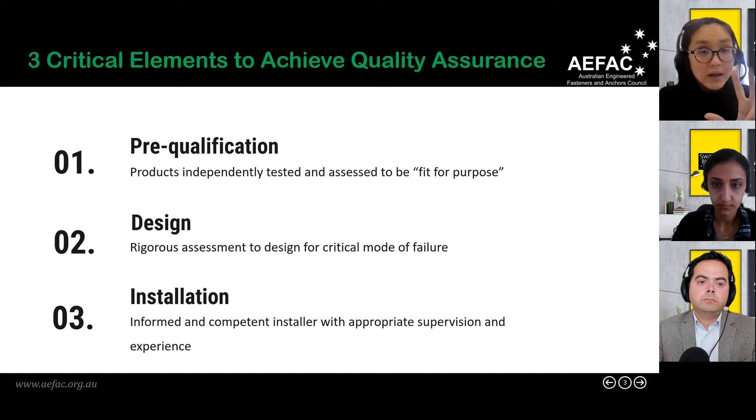Number two, robust design is required to ensure that all possible failure modes have been considered and the anchor is designed for the critical failure mode. The third element important for quality assurance is installation, which tends to be the weak link. Many failures have occurred in the past due to poor installation practices. So all three elements are critical to ensure good quality assurance for the fastening.

A bit of introduction to AEFAC. AEFAC is a not-for-profit industry initiative founded in 2012 by Swinburne University and six other industry partners, as you can see on the slide: DeWalt, Hilti, Hobson, Leviat, Ramset, and Wurth, to introduce governance to the anchor industry based on the three critical elements for quality assurance we just visited earlier. Prior to the formation of AEFAC, the industry was fragmented. There was no uniformity or consistency in terms of anchor pre-qualification, specification, design, or testing.

AEFAC has since grown. There are currently 13 industry members contributing to the work done by AEFAC.

AEFAC contributes to various sectors in the anchor industry to uplift safety, quality, and efficiency. For designers, AEFAC provides guidelines for design and specification of anchors. For contractors, AEFAC provides training and certification for installation of anchors. For field engineers, guidelines are provided for field testing of anchors on site. For manufacturers, guidance is provided for minimum performance required for anchors in safety-critical applications. And lastly, at Swinburne, we continue to do a lot of R&D in various research areas, such as performance of anchors in early-age concrete, seismic, and other types of innovative concrete.

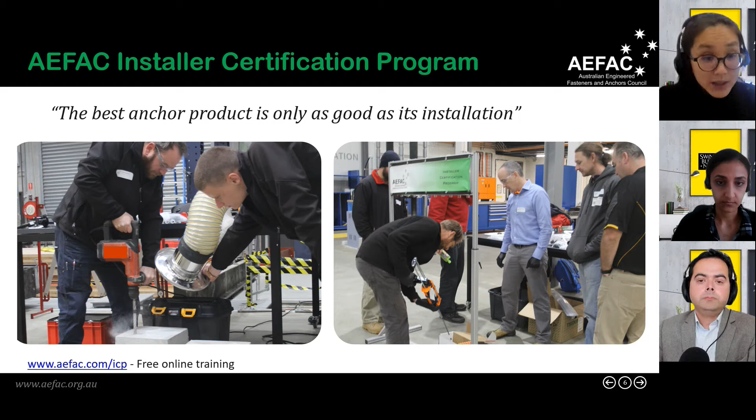AEFAC instigated the development of TS 101 in 2015, which is the first deemed-to-satisfy guideline for design of anchors in concrete. TS 101 was then developed into a full Australian standard, AS 5216, in 2018. And this year, the new version of 5216 is published.

AS 5216 covers the design of post-installed anchors and anchor channel. However, the items listed in red were not covered in the 2018 version. In the latest revision in 2021, we have now covered items for seismic, anchor channel in three-dimensional loading, post-installed rebar connections, and redundant non-structural connections.

There will be other webinars coming up to cover the other topics, but for today, we are looking at design for seismic actions.

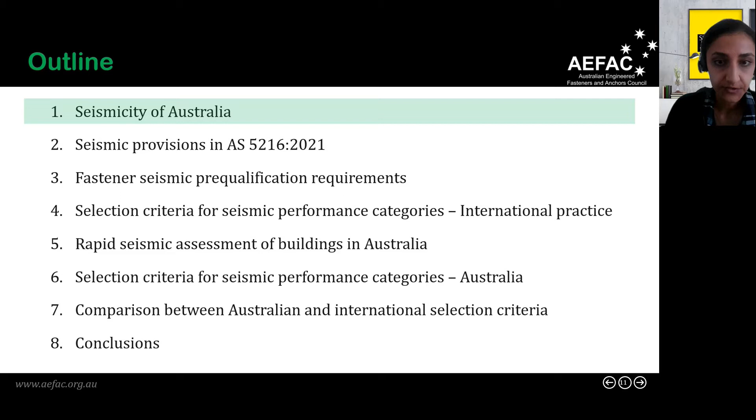Starting with the seismicity of Australia. As most of you know, Australia is considered to be a low to moderate seismic region. I'm going to play this video here from Geoscience Australia, which is showing the significant earthquakes that have happened in Australia since 1964. We can see that Australia does experience frequent earthquakes, even though it is typically considered to be tectonically stable.

Australia is actually one of the most active intraplate regions in the world, as it's in compression due to the Indo-Australian plate moving towards the Eurasian and Pacific plates. As stated by Geoscience Australia, Australia is subjected to earthquakes of magnitude 5 or greater on average every 1 to 2 years, and earthquakes above magnitude 6 occur about once every 10 years.

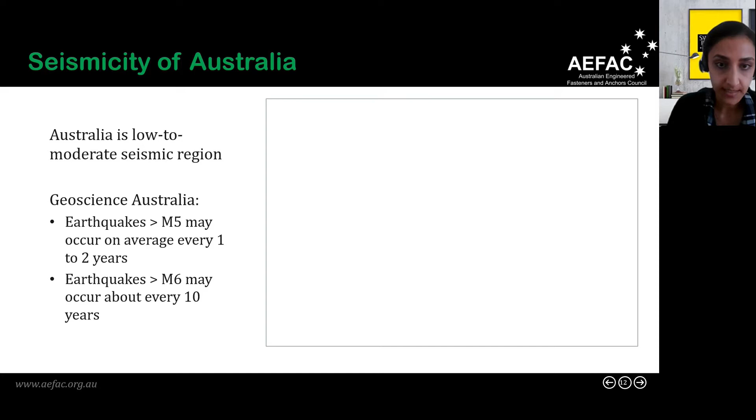This is the current seismic hazard map, which is in the Australian Earthquake Loading Standard, AS 1170.4. One key challenge with Australia is predicting where earthquakes can take place, and that's why since 2018, the standard has specified minimum hazard levels for different return period events defined by the variables kp and Z. So now the minimum hazard design factor to be considered for a 500-year return period event is set to 0.08.

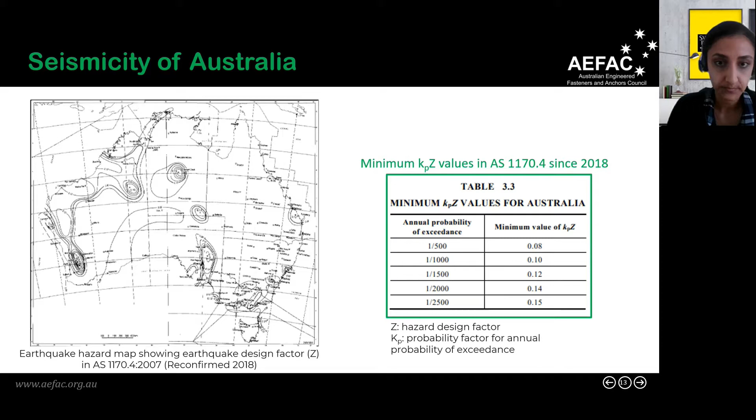I'd like to also highlight that in the past we have seen significant damage caused by relatively moderate magnitude earthquakes. One of the most damaging and costly earthquakes was the 1989 Newcastle earthquake, which was magnitude 5.6. It caused 13 fatalities, 160 serious injuries, and resulted in 50,000 buildings being damaged and around 300 buildings requiring demolition. We've had larger magnitude earthquakes as well, but because most of them have happened in remote locations, the damage caused has not been as great as the Newcastle earthquake.

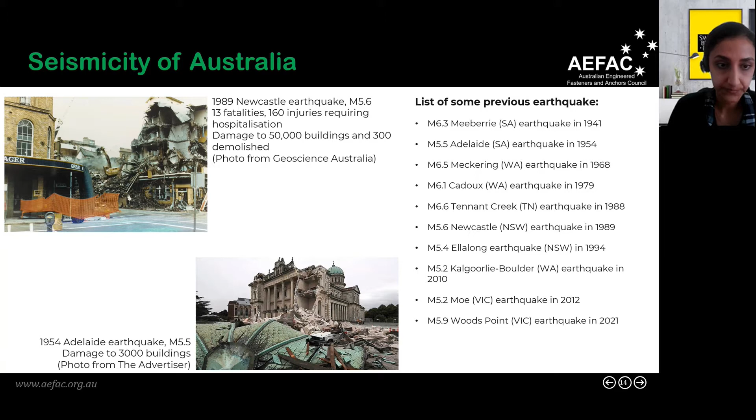Now, for those of you in Victoria, a couple of weeks ago you would have experienced some shaking. On September 22nd, Victoria had the largest earthquake that has been recorded: a magnitude 5.9 earthquake near Woods Point, approximately 130 kilometres east of Melbourne. The earthquake event as experienced in Melbourne was less than 20% of the design event for most buildings. For this size of event, it was expected that buildings would respond within their elastic range with minimal damage, and this was generally observed all throughout Melbourne.

In general, the most vulnerable buildings to earthquakes are unreinforced masonry buildings, which can fail at lower earthquake events, and an example of this was seen with one of the buildings on Chapel Street.

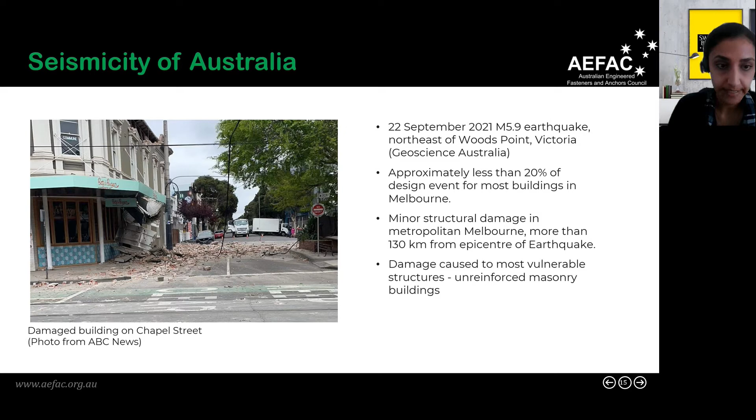So now I'll move on to discussing the seismic provisions that have been added in the 2021 version of AS 5216. The design requirements for seismic actions have been included in Appendix F of the standard, and I've just highlighted the clauses that you will find in that appendix.

In terms of the scope, it needs to be considered for structural and non-structural elements that need to be designed for earthquake actions in accordance with AS 1170.4. The scope currently covers post-installed fasteners located in regions of concrete members where concrete spalling or yielding of reinforcement is not expected to take place. I'll talk a little bit more about this point later on.

The standard describes the pre-qualification requirements in Clause F3, and the design requirements are provided in Clause F4 to F7. Reference is provided to the AEFAC technical note for design, which you can find on the AEFAC website. My presentation today will focus on the pre-qualification requirements, and then Tilak will discuss the design requirements.

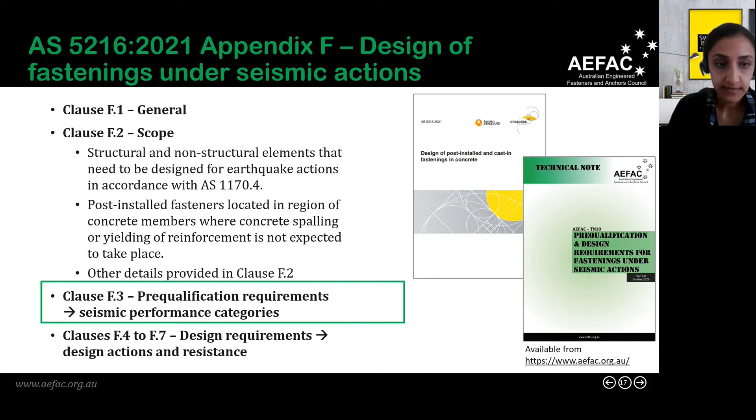So moving on to looking at the seismic pre-qualification requirements for fasteners. Generally speaking, fasteners don't have predictable capacities for all failure modes, and therefore they require pre-qualification, which involves a series of tests and assessment procedures to define their performance.

Different pre-qualification is required based on the intended use of the fastener. The pre-qualification requirements are provided in AS 5216, which refer to European assessment documents or technical reports. There are 4 levels of pre-qualification. The first 2 are for cracked and uncracked concrete, and these include tests conducted for reliability and service conditions of the concrete substrate.

For cracked concrete, the fasteners are tested in approximately 0.3 mm crack widths. These requirements are covered in the 2018 version of AS 5216.

Now, the other 2 levels of pre-qualification are for seismic conditions, and they're referred to as Seismic Performance Category 1 and 2, or simply C1 and C2. These are now included in the 2021 version of AS 5216.

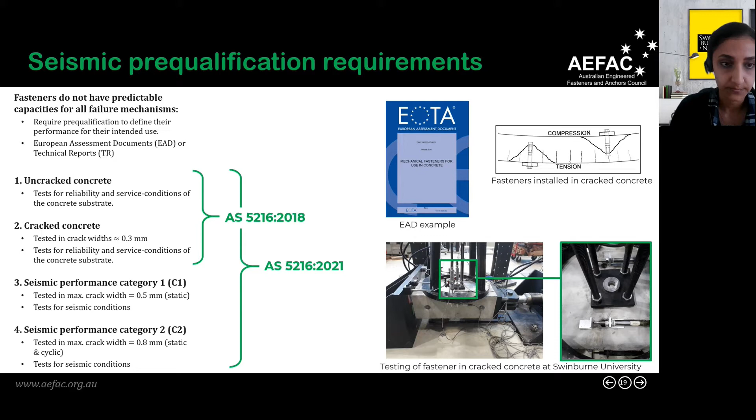The seismic pre-qualifications are based on European practice, provided in the Technical Report 49 by EOTA, the European Organisation for Technical Assessment. For C1 category, the fasteners are installed in a crack which is open to 0.5 mm.

Then the fasteners are subjected to pulsating tension and alternating shear loads. The crack width is kept constant throughout the test, and the fasteners are not allowed to fail at a specified load and number of cycles. If they do fail, then the test must be repeated at a reduced load.

For C2 category, similar tests are conducted as for C1. However, the cracks are opened to 0.8 mm during cyclic load tests. There's also an additional crack cycling test where the crack is opened and closed under tensile load, done to simulate the effect of moment reversals that may be experienced by a structural member.

I'd like to also note that similar pre-qualification requirements also exist in the United States. However, they currently only have 1 seismic performance category, which is equivalent to C1, but they're also in the process of introducing a 2nd category, which will be similar to C2.

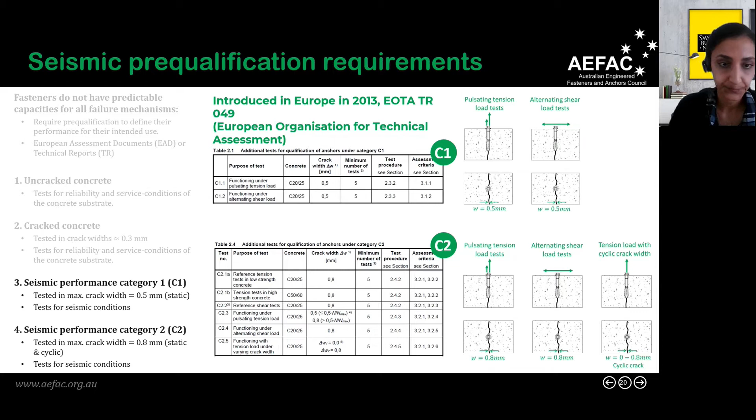So the seismic pre-qualification requirements discussed today all assume that the fasteners are located outside of regions where yielding of reinforcement and spalling of concrete may occur. So if we're looking at flexural members, this means that it's outside of plastic hinge regions.

And this is reflected by the conditions under which the pre-qualification tests are undertaken, including the maximum crack width limit of 0.8 mm, which is based on studies that have shown that at yield, the upper bound estimate of the crack width is around 0.8 mm.

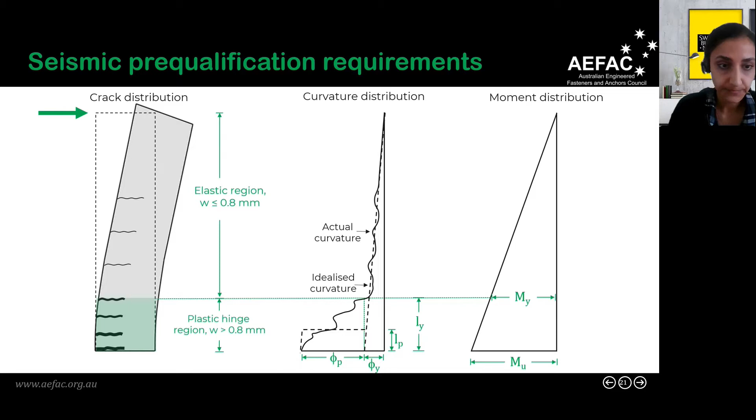So having the different levels of pre-qualification leads to the question, what level of pre-qualification is required for fasteners designed to resist seismic actions? To answer this question, we first reviewed international practice to see what type of selection criteria is adopted.

And that takes us to the 4th item for this presentation. I'll just briefly go through some of the selection criteria that we see in international standards.

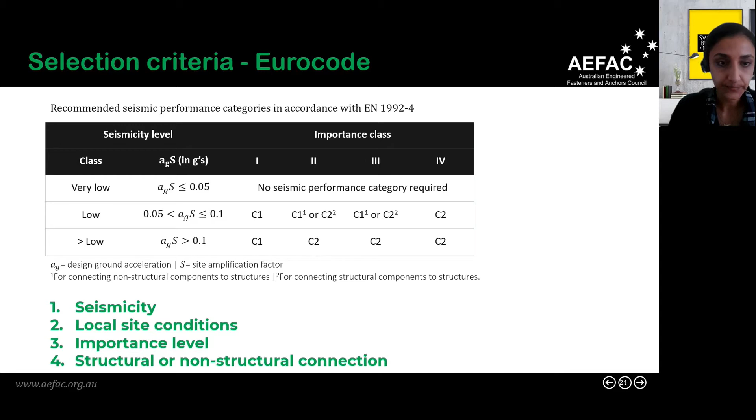However, since it's not always practical or feasible to calculate the crack widths, they also use the behaviour factor to approximate the expected crack widths. The behaviour factor is a parameter used in design which accounts for the level of intended inelastic response of the structure. It is equivalent to the ductility factor divided by the structural performance factor in accordance with the Australian practice for seismic design.

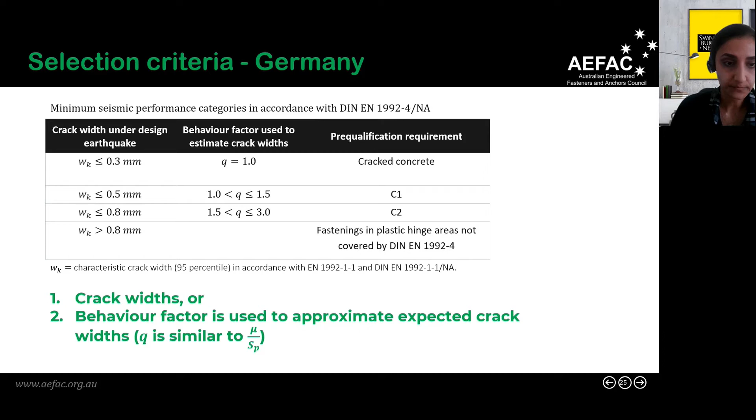In the United States, the fasteners need to have seismic pre-qualification based on the seismic design category of the structure, and these are assigned based on seismicity, local site conditions, and risk category. Also, with the introduction of the second seismic performance category, it is likely that this selection criteria will be extended, and it may incorporate a structural response parameter.

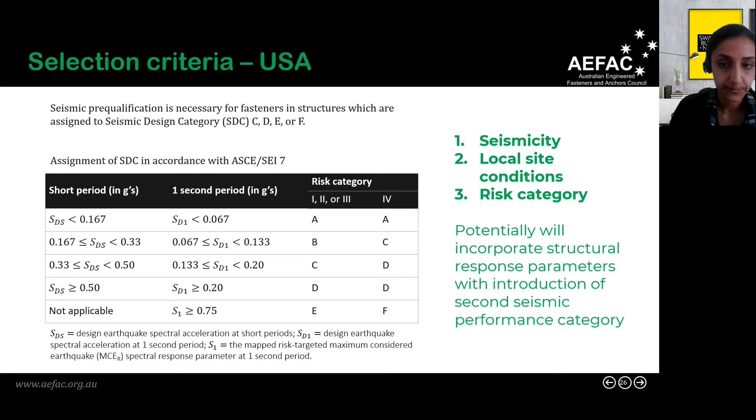So what we can see is that in general, there's no consensus on the parameters or limits used to define selection criteria in different standards. Each country or region has adopted a method suitable for their own seismicity, design, and construction practice. But in general, we can see that they have considered one or more parameters related to seismic design, design of the structure, seismic demand, and also the consequence of failure of the structure.

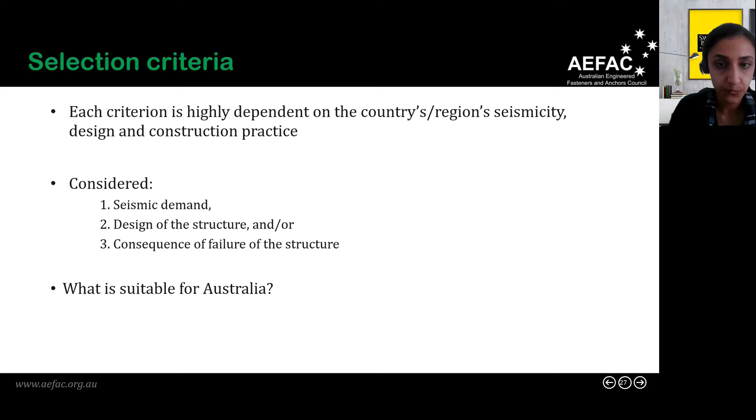So the question that remained was, what is suitable for Australia? And to help us answer that question, we first undertook rapid assessment of buildings in Australia.

The approach that was adopted used displacement-based principles instead of force-based principles, which are typically used in design. The advantage of using a displacement-based approach is that the focus is on deformation demand, which can then be more directly related to the damaged state of the building and its components. And this assists with determining the level of pre-qualification that is required for the fasteners.

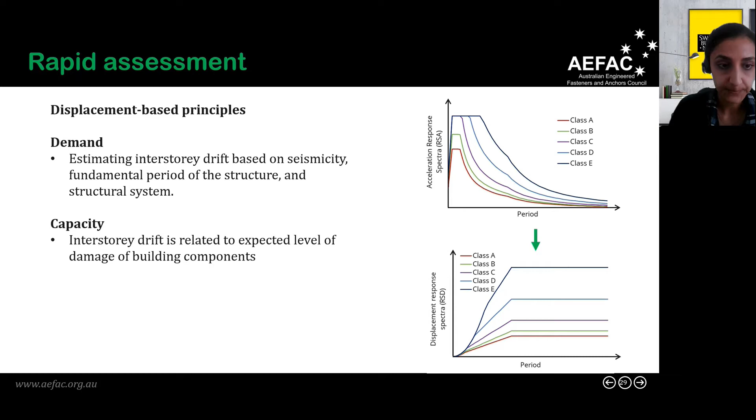This is an overview of the assessment approach that was adopted to approximate the seismic displacement and drift demand on a building, which used existing models in the literature. Different types of buildings, including worst-case scenario type of buildings with plan asymmetry, were considered for a range of earthquake intensities and different site conditions.

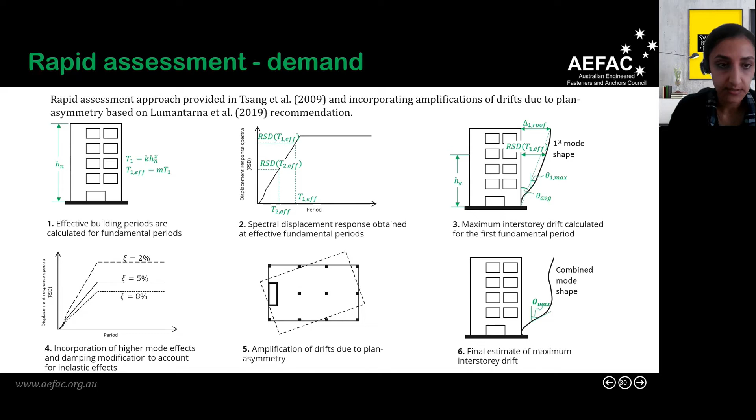Then we set limits to the interstory drifts for which the different seismic performance categories are likely to be suitable. And to develop these limits, we looked at interstory drift that is likely to correspond to initial yield of flexural members, experimental results for the progression of crack widths and drift demand, and expected ultimate drift capacity of the building components.

And what we concluded was that for drifts less than 0.5%, seismic pre-qualification of the fasteners is not required. For drifts between 0.5 and 1%, C1 category was necessary, and then for drifts greater than 1%, we suggested C2 category.

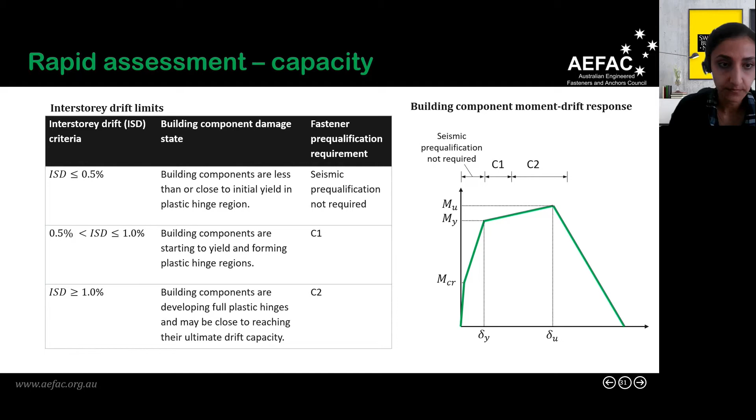We then plotted the expected maximum interstory drifts for various buildings considered, so buildings with various heights, and for a range of seismic intensities and site conditions, which was defined by using the parameters in the Australian Earthquake Loading Standard, including KP, the probability factor, Z, the hazard design factor, and FV, the site amplification factor in the velocity control region. And this can be calculated from the response spectra provided in AS 1170.4 for the various site conditions.

And by looking at the 95th percentile of the results obtained, we looked at the limits at which the 0.5% and 1% drift were reached.

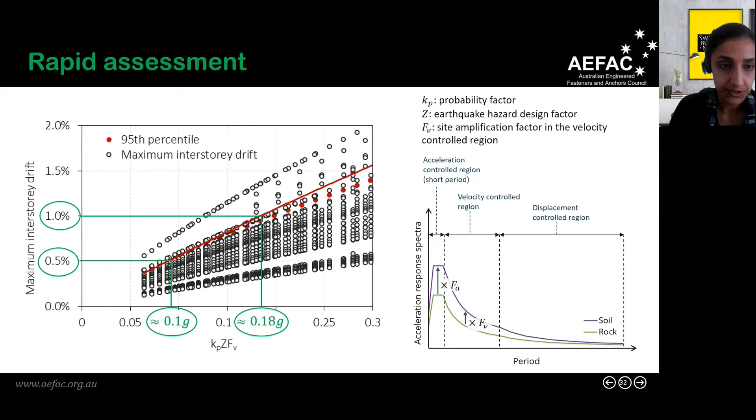So the limits from the previous graph were then used as a guide to develop this table here, where essentially the limits obtained from the analysis are directly adopted for importance level 2 buildings. And then for importance level 3 and 4 buildings, the minimum level of pre-qualification is set to C1 and C2 respectively.

And this is because the failure of connection in these high importance level buildings will have greater consequences. Also, you'll notice that seismic pre-qualification is not defined for importance level 1 buildings, and this is because AS 1170.4 does not require seismic design of these structures. So essentially, we've ended up with a table that is similar to Eurocode, but it's based on what we expect to be suitable for Australian conditions.

We have also not set separate requirements for structural and non-structural connections. And this is because if a connection is safety critical, then the failure of the connection can be equally severe.

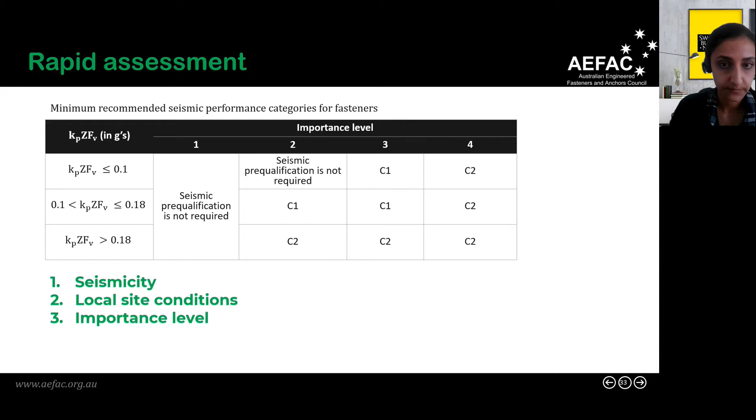So now I'll go through the selection criteria that you'll find in AS 5216. You'll notice that we've included two criteria for determining the seismic performance category required for the fasteners: one referred to as a normative requirement, and another referred to as an informative requirement.

This is the table in AS 5216 that we've included as an informative requirement. It's essentially the same table I showed previously as a result of the rapid assessment. However, instead of showing the site amplification factors, we've specified the requirements for each site class separately, to make sure the information is presented consistently with AS 1170.4.

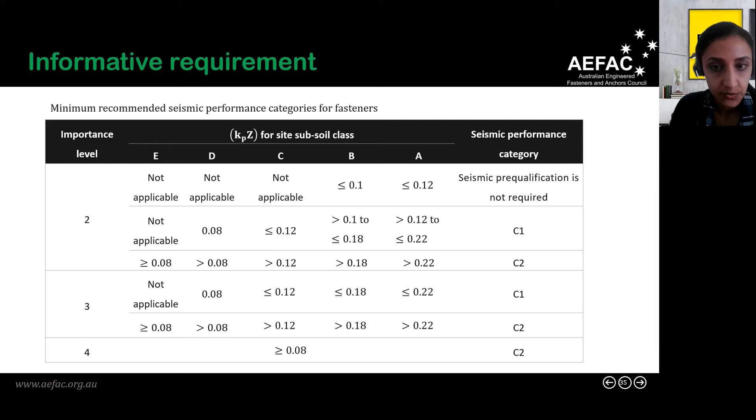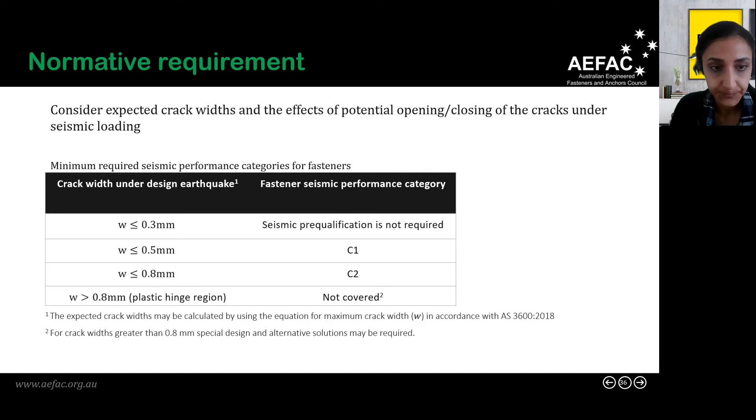I'd also like to go through a couple of examples which show the seismic performance category required for fasteners for different buildings, and we've done a comparison using both the Australian selection criteria and some international standards.

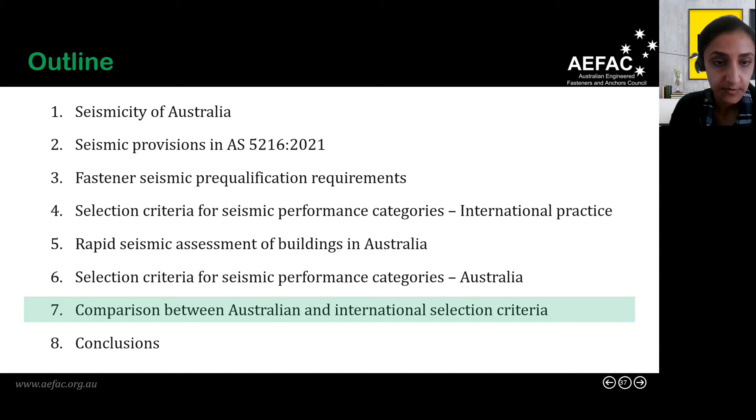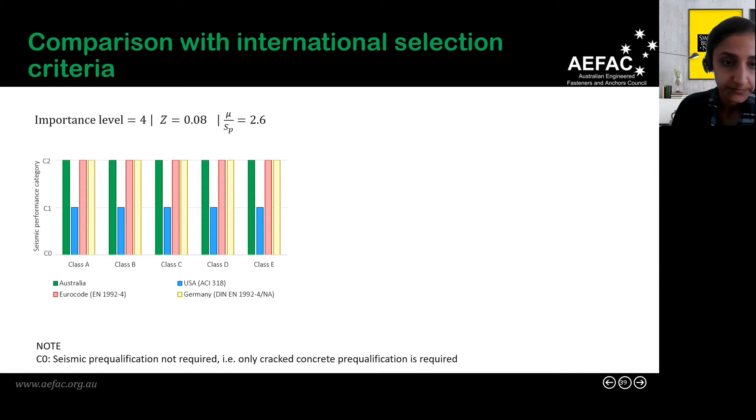Before I end, I'll go through some conclusions. I've provided a brief overview of the study undertaken to develop the criteria for selecting suitable seismic performance categories for fasteners in Australia. Two forms of criteria have been provided in AS 5216: one is a normative requirement, which involves assessment of the structures to determine the expected level of damage to the concrete substrate, and the other is an informative requirement, where the level of pre-qualification is determined based on seismicity, local site conditions, and importance level of the building.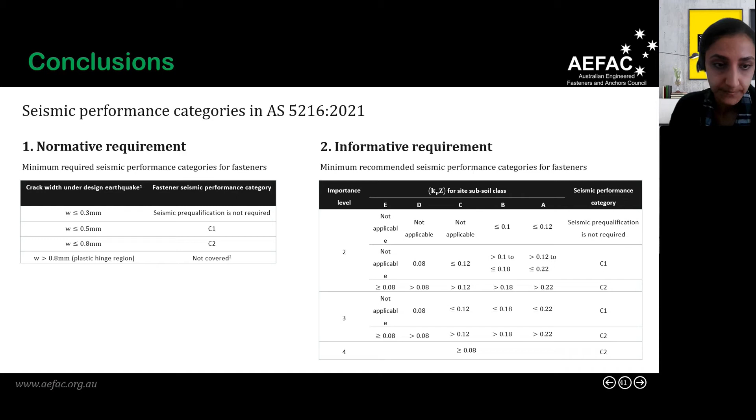Thank you, Anita, for covering the pre-qualification part. I will be talking about the design part. Before starting the design requirement, I'll start with the scope and limitation of the standard. The current requirement given in AS 5216 2021 is only for post-installed fasteners. There is also a requirement for the low seismic region: for example, if the seismic design tension force in a fastener or group of fasteners is less than or equal to 20% of the design force combinations, some sections of the standard can be omitted.

Stand-off fasteners with a grout layer more than 0.5 times the diameter of the fasteners are not covered by the standard. Similarly, fastenings for redundant non-structural applications are not covered. The standard assumes that loosening of nuts and screws is prevented throughout the life of the connections. And finally, it doesn't cover fastenings in plastic hinge regions.

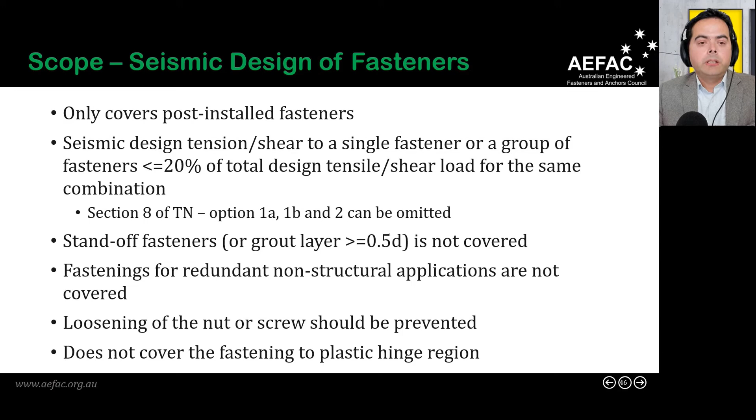For the provisions, the design of connections for the transmission of earthquake loads is carried out in accordance with Appendix F of the standard, as Anita mentioned before, and the design value of the seismic actions is determined in accordance with 1170.4. There is a distinction in the standard on the design options depending upon the ductility requirement of the connections.

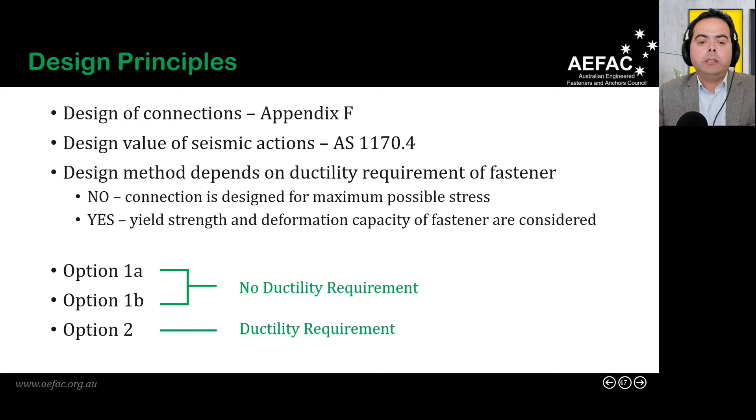Accordingly, there are three design options given in the standard. Option 1A and 1B are for conditions where there is no ductility requirement in the connections or due to the fasteners, and option 2 is used where the ductility requirement of the fasteners is considered.

So let's talk a little bit more about those design options. Let's start with the first one, capacity design. The connections are designed for the maximum stress that can be reached when ductile failure of the component to be connected occurs, and the fasteners will stay within the load limit, with no damage in the fasteners.

Option B is the elastic design option, and the connections are designed for the maximum seismic actions, assuming an elastic behavior of the structure as well as the elastic behavior of the fasteners.

And option 2, which considers the ductility of the fasteners, the design should consider the ductility along with the yield strength and deformation capabilities of the fasteners properly.

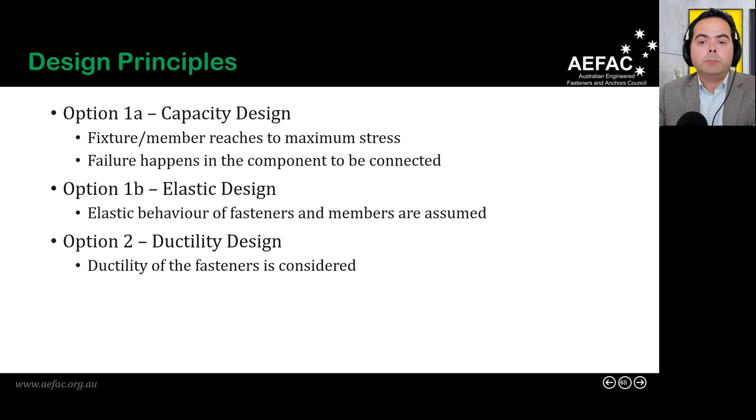There are some requirements to be used for all the options, 1A and 1B, and we have covered those requirements in the presentation so far, but I'd like to highlight them again because they are relatively important. For the seismic design, the fasteners used must meet all the requirements from non-seismic conditions first. The C1 and C2 pre-qualification testing Anita just mentioned are on top of the requirements we have for non-seismic conditions.

Only the fasteners for cracked concrete need to be used in this section of the standard, and connections within the hinge region are not covered, because in the hinge region there would be yielding of reinforcement or spalling of concrete, which significantly reduces capacity. In some cases there wouldn't even be concrete to hold the fasteners in place.

So to design the fasteners using option 1A, the capacity design method, the design is done for the maximum tensile and shear load, and the fasteners are designed at least for the load combinations in which ductile yield can form in the member connected, or the fixing plate used to connect the member to the fasteners.

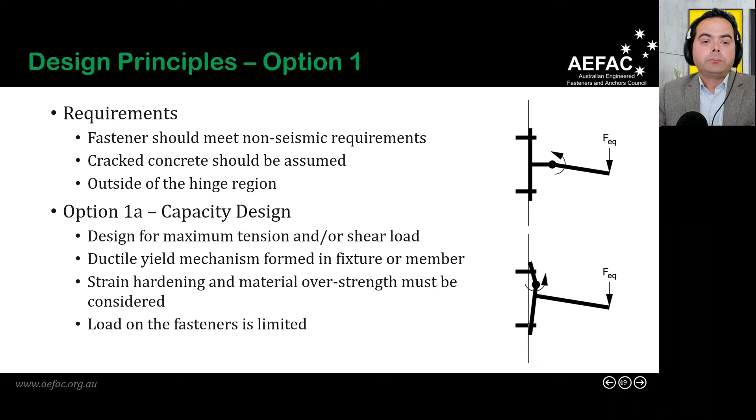In this case, strain hardening and material overstrength should be considered, and hence the load in the fasteners should remain reliably within the limit. It's very important to note that the tension and associated shear force must be limited and superimposed accordingly during the design process.

Option 1B is relatively easier, designed for the maximum load obtained from the design load combinations that include seismic actions corresponding to ultimate limit states. We assume the structure as well as fasteners behave elastically throughout the life of the structure, and as we are doing the elastic design, the force is not reduced. That means the Sp over mu factor should be assumed as 1 during the derivation of the forces.

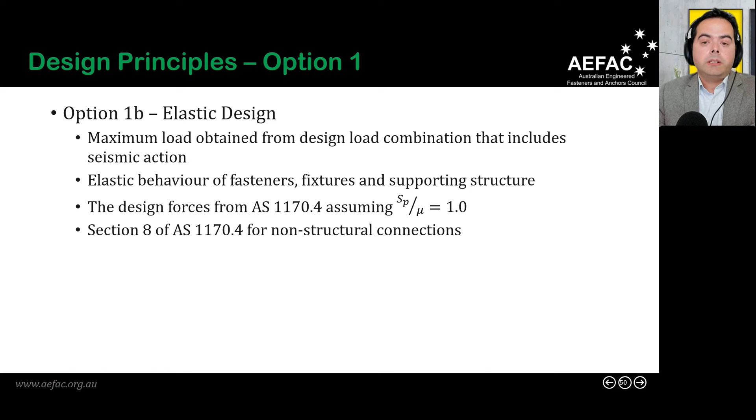The seismic loading standard AS 1170.4 is used if you are designing the non-structural elements, non-structural connections. Section 8 of that standard is used.

Option 2 is a little bit complicated, and there is no extensive application experience with this design option so far. Without additional detailed investigation, this application is recommended to be used for non-structural components only.

In this method, the fasteners are designed for the maximum load obtained from design load combinations that include seismic actions corresponding to ultimate limit states. The fasteners should comply with seismic category C2, and the tensile steel capacity of the fasteners shall be smaller than the tensile capacity from concrete-related failure, because we want to have ductile failure, and concrete-related failures are brittle, which we don't want.

This option 2, the ductility method, applies to pure tension loads. Shear loads shall be carried by some other fastening elements. Depending on the application, there could be further requirements regarding elongation, ultimate strength, and so on. The fasteners shall not be used for energy dissipation for the structure.

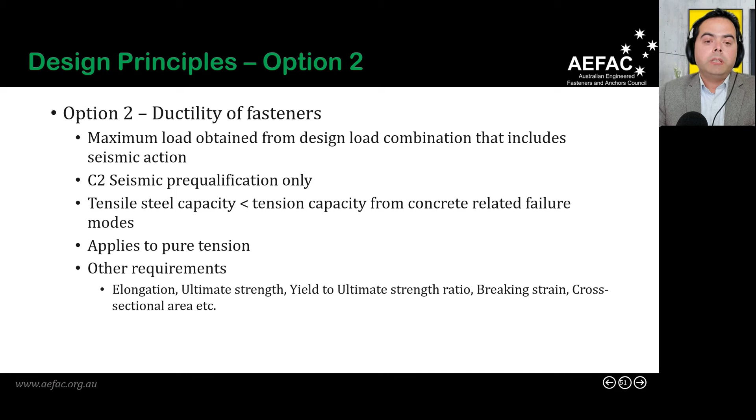If you want to consider that, a higher level of analysis, such as dynamic non-linear time history analysis, needs to be done. More importantly, the hysteretic behavior of the fasteners should be included in pre-qualification reports such as ETA.

In option 2, the ductility method, the failure of fasteners as steel element is very important. To ensure that steel failure, there are actually 3 conditions given in the standard. Condition A is for single fasteners used in tension. Option B is group of fasteners, and there is an additional option for mechanical fasteners used to transmit the seismic actions, actually the tensile forces.

To transmit tensile load, the fasteners need to be ductile, and there needs to be some stretching length which needs to be greater than or equal to 8 times diameter. The ductility requirement is given in AEFAC Technical Note 10, which is referenced in AS 5216.

To have the fasteners ductile, the yield strength needs to be less than 800 megapascal, and the ratio of yield to ultimate should be less than 0.8. There is also some requirement on the elongation capacity of the fasteners.

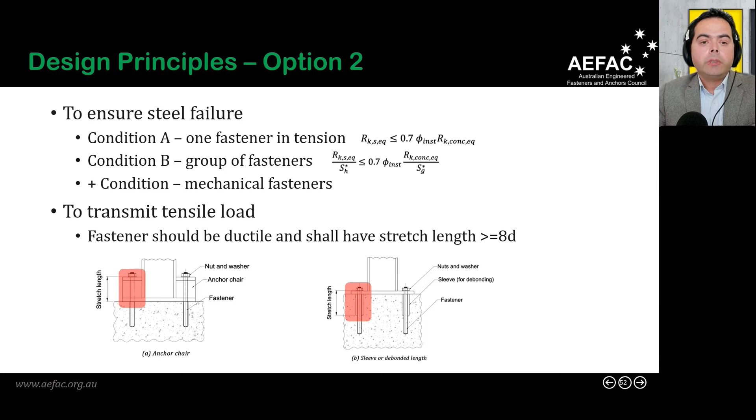For the forces, as I mentioned before, we use the Australian seismic loading standard AS 1170.4 to get the forces in the connection. If we are designing non-structural components, we use section 8 of that standard. If you don't have otherwise to prove, we use the maximum value of tension and shear forces, and we apply them simultaneously.

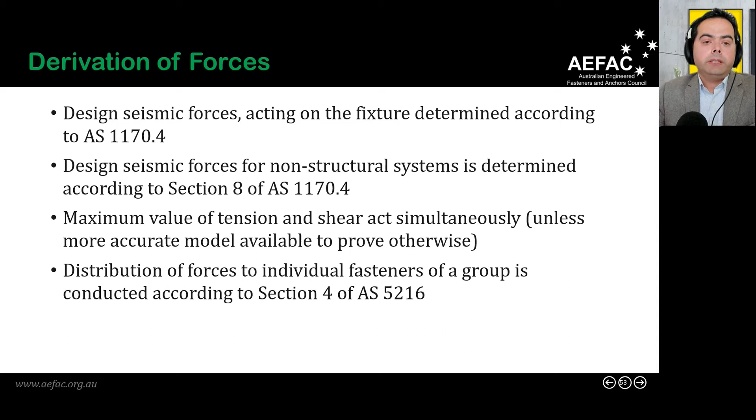So this is the equation from the standard. We have RDEQ, and this RDEQ needs to be determined for loading, all possible loading directions - tensile loading, shear loading, or if there is any incline loading.

This value needs to be calculated for all possible failure modes, such as steel failure, pull-out failure, concrete splitting, pry out, any failure you have. And phi I in this equation represents the capacity reduction factor for that particular failure mode.

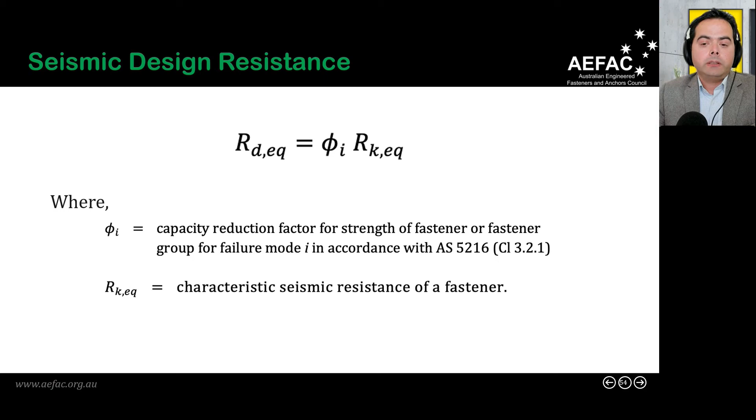This phi I value should be calculated in accordance with Chapter 3 of AS 5216. And RKEQ on the right-hand side of the equation is the characteristic seismic resistance of a fastener. Now let's see how we calculate that value.

The characteristic seismic resistance is calculated from the basic seismic characteristic resistance, which is R0 KEQ. If you compare these equations with the design equation for static loading, the resistance to seismic action is reduced by 2 factors, alpha gap and alpha EQ.

The alpha gap factor takes into account the presence of an annular gap between the fasteners and attached component or fixtures under shear loading. The alpha EQ takes into account various factors, including uneven load distribution, and the cracking associated with that uneven load distribution.

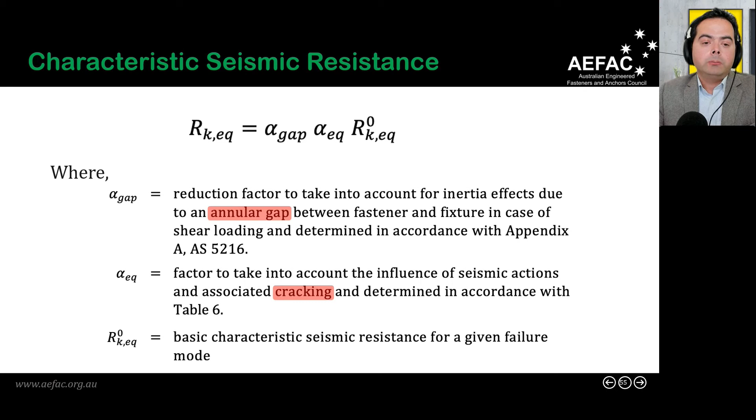I'll talk about the more detailed method on how to calculate R0 KEQ, but before that, let's see the factors - the annular gap factor, alpha gap. As I mentioned before, this is introduced in the standard to consider the effect of the annular gap.

It's not a detailed method to calculate the alpha gap value, but from past experiments, we have seen that the fixture or attached element hits the fastener if there is cyclic loading, and we call that the hammer effect, which will increase the load in the fasteners. But for simplicity in this standard, this hammer effect is used to reduce the capacity of the fasteners rather than increase the load.

So there is not a detailed analysis method available at this moment. We don't know the effect of gap length, number of cycles, or type of material being used. So we are recommending a simple method to get this alpha gap value. If there is an annular gap, we use 0.5 as alpha gap. If there is no gap between the fasteners and fixture element, we use alpha gap value as 1. If you want to use alpha gap equals 1, there are some requirements you need to meet.

These are given in clause 4.2.2.1 in AS 5216. For example, if you have fasteners welded on the fixture plate, alpha gap can be used as 1. If you have fasteners screwed on the fixture plate, you can use alpha gap equals 1. Sometimes the gap or hole clearance can be filled with an appropriate method to increase the value of alpha gap from 0.5 to alpha gap equals 1.

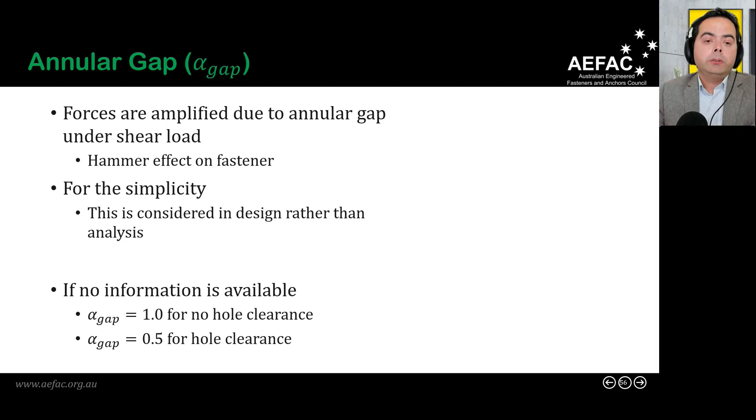Another factor, alpha EQ, depends on the loading direction, loading type, and the failure mode you are considering. This value varies from 0.75 to 1, and this table is from the AEFAC technical note 10. If you know the loading you are considering and the failure mode you are designing for, you can get the alpha EQ factor for single fasteners or fastener groups.

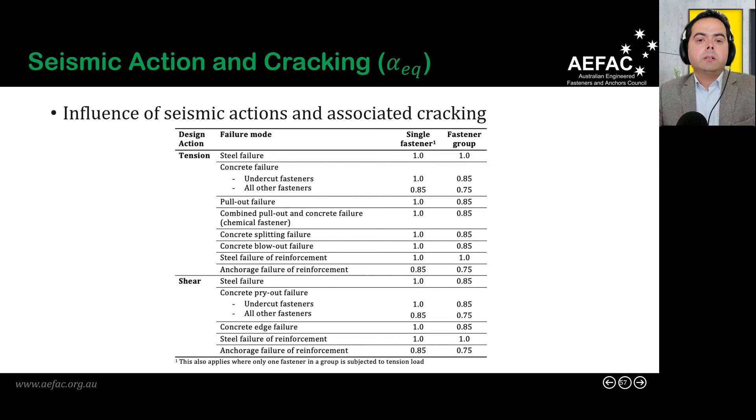Now let's come back to R0K EQ. This is the basic characteristic seismic resistance, calculated depending on the failure mode and type of loading you are considering. For example, if you have steel failure or pull-out failure under tension load, or shear failure or steel failure under shear load, these values are determined from the pre-qualification report prepared according to Appendix A of AS5216, such as a pre-qualification report ETA.

And if you have a combined pull-out and concrete failure in case of chemical anchors, the R0K EQ value is taken as NRKP, the pull-out capacity, with tau RK, the bond strength, replaced with seismic bond strength tau RK EQ. For other failure modes, the relevant section of AS5216 needs to be used. In all cases where tau RK is used, this needs to be replaced with tau RK EQ to get the seismic resistance of the fasteners.

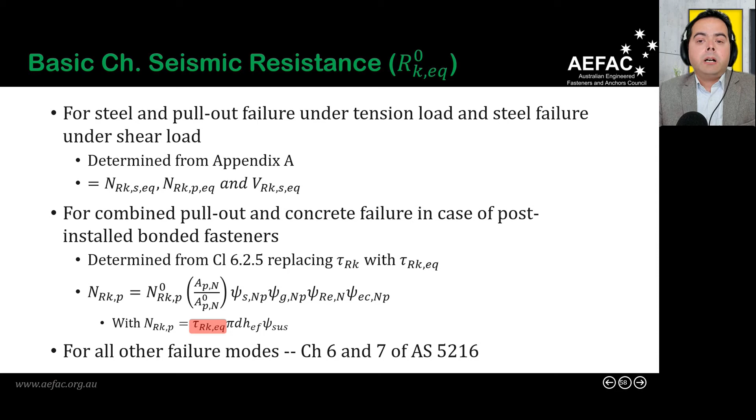For the verification of combined tension and shear forces, this needs to be carried out in accordance with Chapter 8 of AS5216. Separate verifications need to be done for steel-related failure and concrete-related failure. There are some additional provisions to Chapter 8 of this standard, given in Appendix F of the standard.

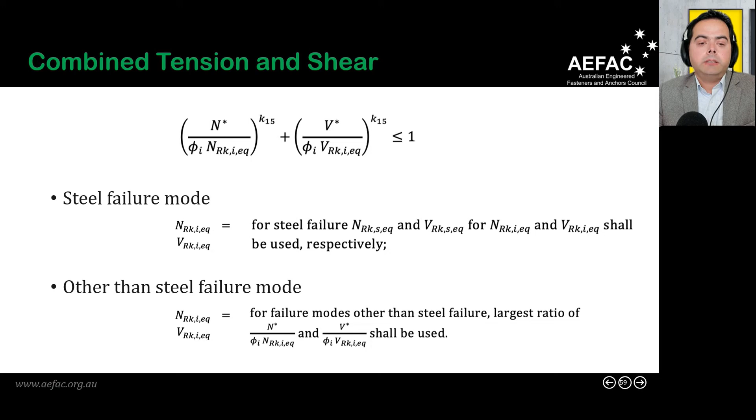In addition to the requirement in terms of strength, in some applications it is also required that the deformation or displacement capacity of the fasteners be verified. The displacement of the fasteners under tensile and shear loading must be limited based on the requirements of the specific application. The limiting displacement limits are application dependent, and the design engineer should determine the allowable displacement in the analysis compatible with the requirements of the structure being designed. So the standard specifies some initial guidelines if there is no detailed analysis for the limiting displacement.

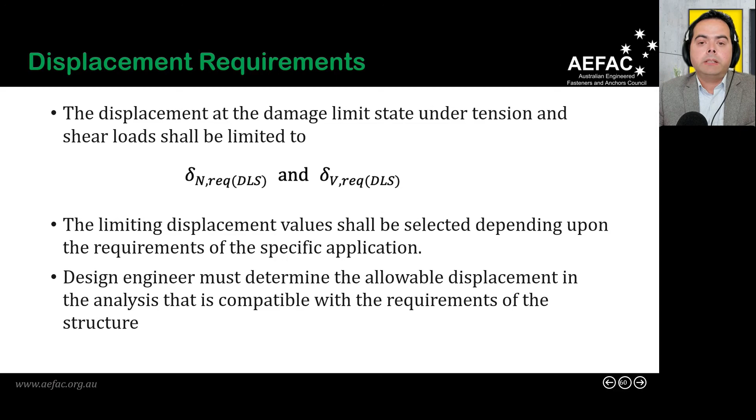For example, if you have fixed connections, the limiting displacement can be taken as 3 millimeters, but it's always the design engineer's call to limit that value. The displacement of the fasteners, delta N and delta V for tensile and shear loading, is given in pre-qualification reports such as ETA. If the specified deformation values are greater than the values required for the application, the associated design value of the fasteners in tension and shear needs to be reduced in accordance with the equation shown on the screen.

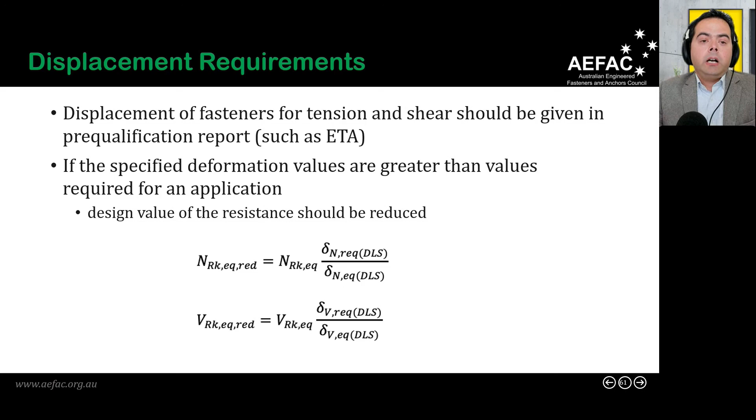Finally, to summarize this presentation: AS5216 has been recently revised, including 4 of the topics, and we covered the first one, Seismic Design of Post-Installed Fasteners. As Jesse mentioned, we'll be having other webinars to cover some other topics as well.

Seismic pre-qualification categories C1 and C2 have been introduced in AS5216, and there are 2 design options we discussed: ductility requirement and non-ductility requirement methods. For the design component, we covered strength requirement and displacement requirement for some high level or high importance structures.